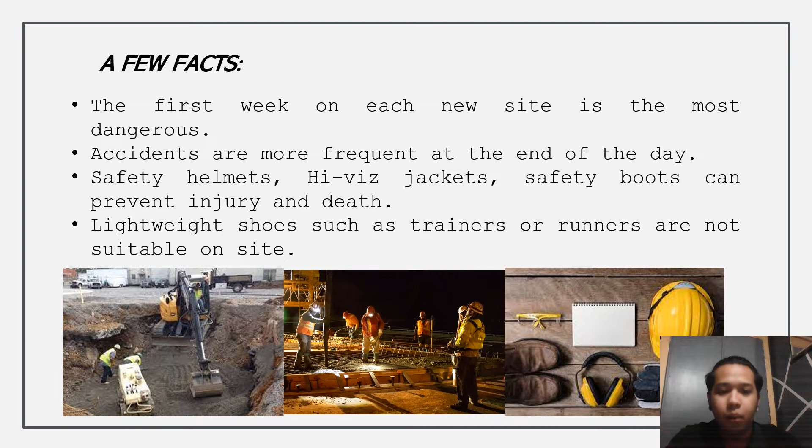Also, safety helmets, jackets, and safety boots can prevent injury and death, and lightweight shoes such as trainers or runners are not suitable on site. So when working in the construction field, we should wear the proper clothes in order to prevent accidents from happening.

So why does the issue of safety arise? Because of frequent accidents, there is a loss of labor, money, time, and material. And also, due to accidents, there is a loss of reputation of the builder.

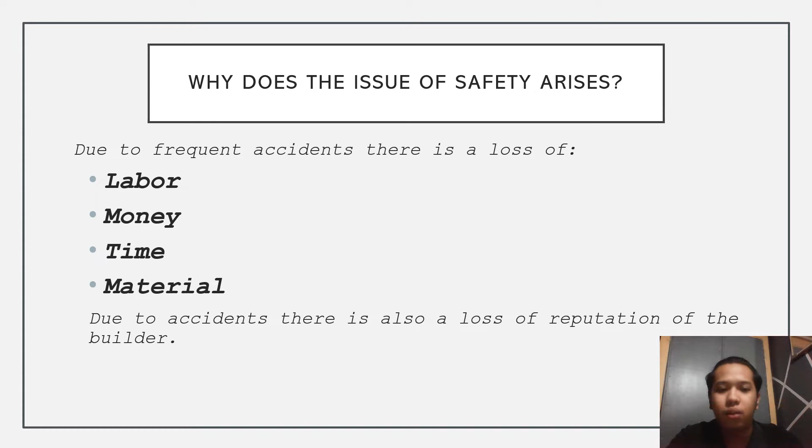If you are the contractor and you have a bad record of accidents that happen under your leadership, it is a stain to your reputation. So as a contractor, we don't want that to happen.

We were saying accidents previously, so basically, what are accidents? Accidents are readily recognized when there is damage to properties and someone is injured. But generally, an accident is defined as an event which is unexpected or the cause of which is unforeseen, any occurrence that interrupts work or whose cause is unforeseen.

However, it is not always easy to determine to what extent accidents are the direct result of the working environment only, so there are factors to consider in determining sources of accidents. It can be unsafe equipment at work areas, long working hours that may cause fatigue, and also improper living conditions and improper working conditions.

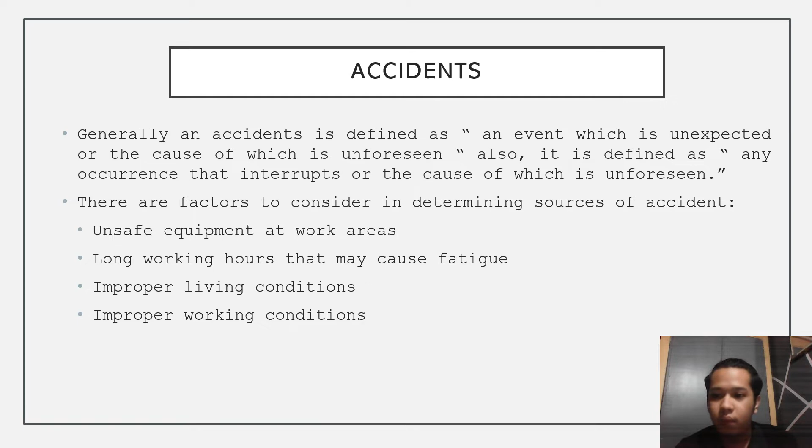In the construction industry, there are many types of accidents that happen. Here is the breakdown of fatalities according to type of accident in the construction industry.

Based on data, 56% are falls from heights, 21% is trapped by something collapsing or overturning, 10% struck by a moving vehicle, 5% contact with electricity or electrical discharge, 4% struck by a flying or falling object during machine lifting of materials, 3% contact with moving machinery or material being machined, and 1% exposure to a hot or harmful substance.

This is why safety precautions should be observed in the construction field, because many types of accidents happen from just one carelessness of a worker, and it can cause injuries and deaths.

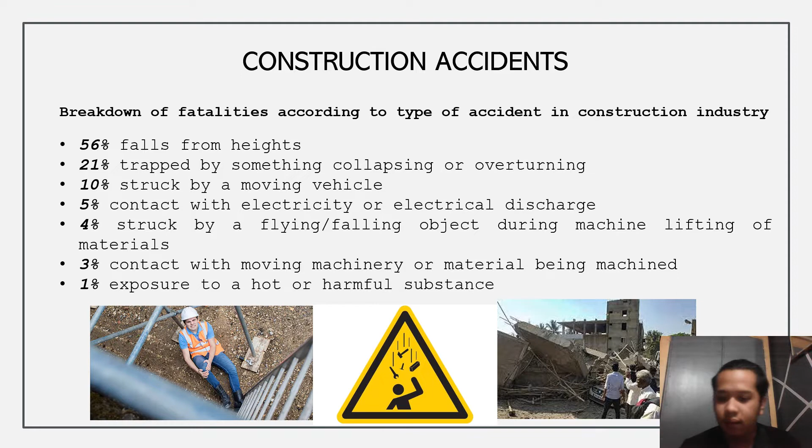We have three classifications of the causes of accidents in the construction industry. The first is human causes, faulty working methods, and also structural failure. Let's dig deeper into this.

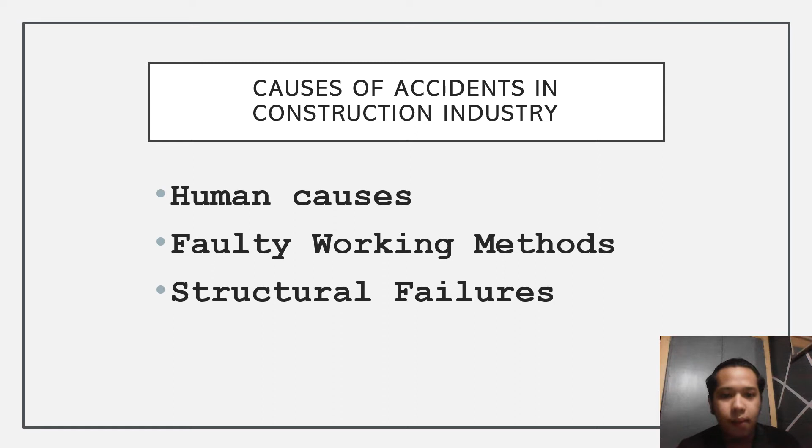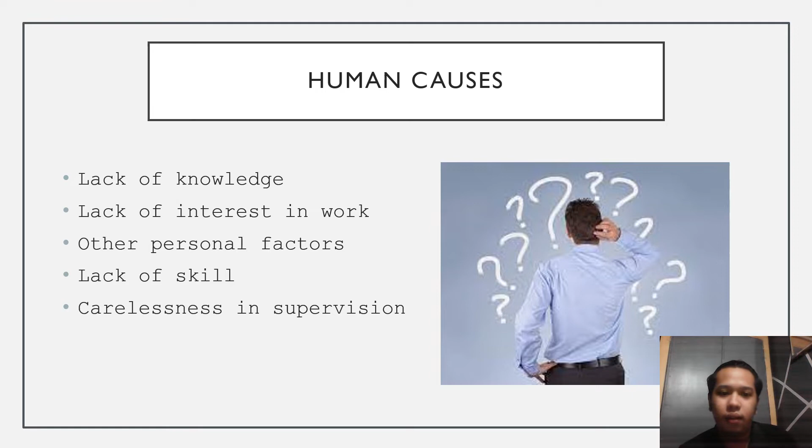For the human causes, the factors are, of course, lack of knowledge, lack of interest in work, other personal factors, lack of skills, and carelessness in supervision. If you are working in the construction field, you should know what you are doing, because if you are not knowledgeable enough in what you are doing, you can be the source of accidents and can lead to injuries and deaths of yourself or other workers.

Also, for faulty working practices, one factor is the use of substandard materials and striking against objects, no use of protective equipment, no site layout, and improper storage of materials. Sometimes, in our desire to lessen cost, some contractors use substandard materials, and because of this, it can be a cause of an accident.

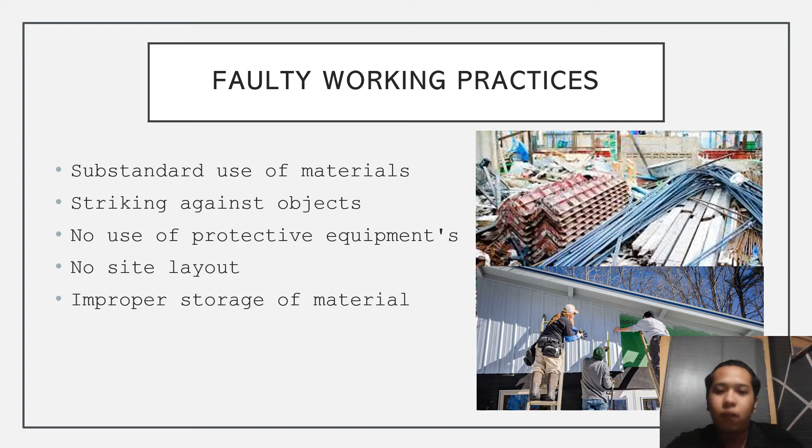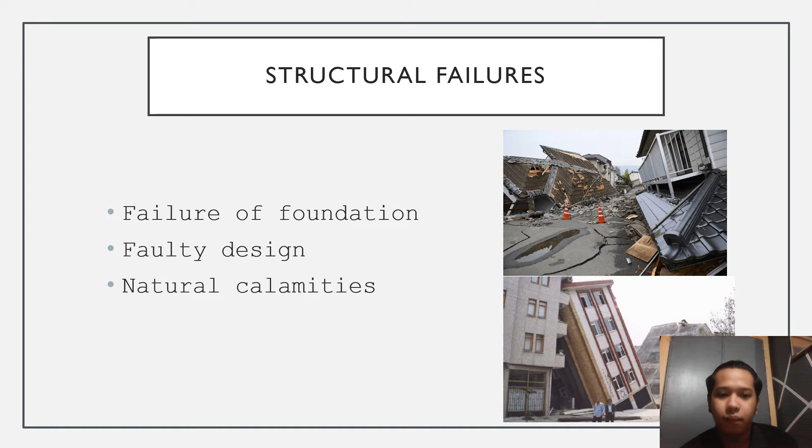For structural failures, examples are failure of foundation, faulty design, and natural calamities. For faulty design, upon doing structural analysis, maybe the loads that are considered are wrong, or the sections are not adequate for such loadings or other variables, and that causes structural failures.

So how to avoid the most common accidents in the construction site? We have several methods or steps to avoid the frequent accidents from happening in the construction field.

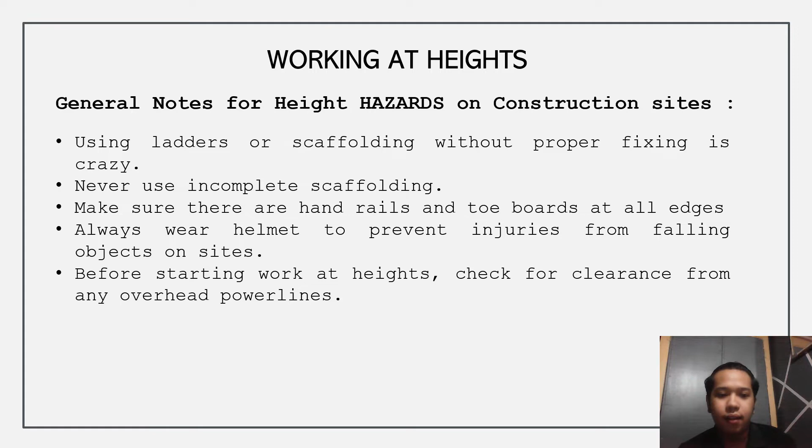Never use incomplete scaffolding. Make sure there are handrails and toe boards at all edges. Always wear a helmet to prevent injuries from falling objects on site. And before starting work at heights, check for clearance from any overhead power lines.

Also, we should observe the proper and safe use of ladders. In the construction field, we often use these ladders when working at heights. First, never allow more than one person on a ladder.

Use tool belts or hand lines to carry objects. Do not lean from the ladder in any direction. If you have a fear of heights, just don't climb a ladder. And do not allow others to work under a ladder in use.

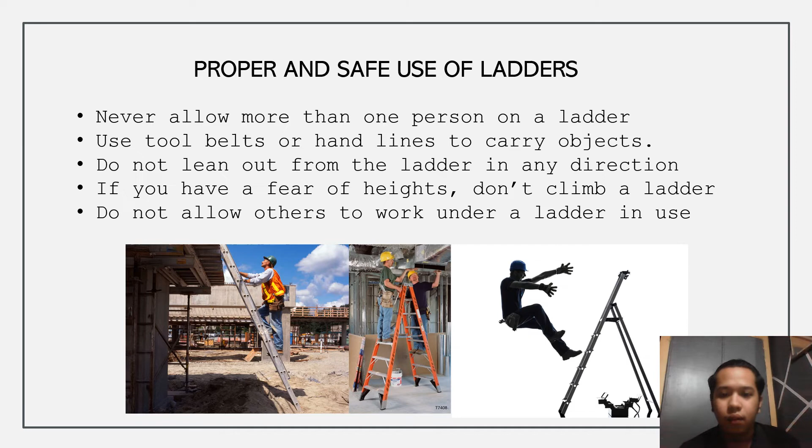If doing excavation work, if you want to avoid being buried alive, apply these rules. First, all excavation deeper than 1.25 meters must be shored or battered. Also, excavation deeper than 2 meters must have a guardrail or barrier, and vehicles tipping into the excavation must use stop blocks.

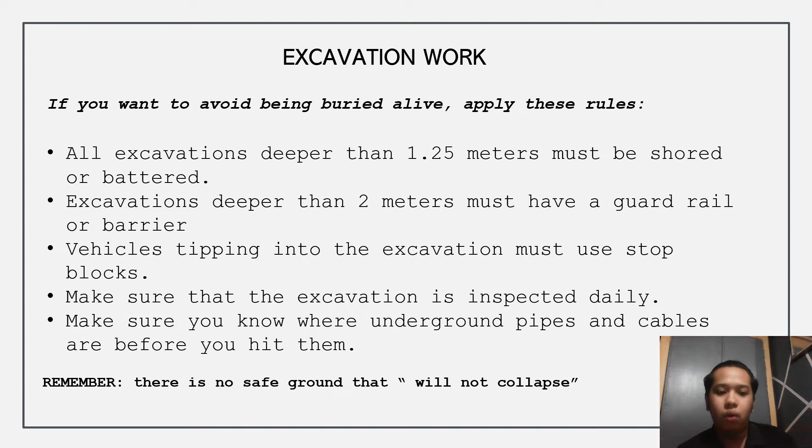We should make sure that the excavation is inspected daily, and make sure you know where underground pipes and cables are before you hit them. We should always remember that there is no safe ground that will not collapse.

Ways to ensure safety. There are many ways to ensure that proper safety is provided on the site. Here are some of the ways we can provide safety on site: the role of the designer, safety program, appointment of safety officer, and provision of personal protective equipment.

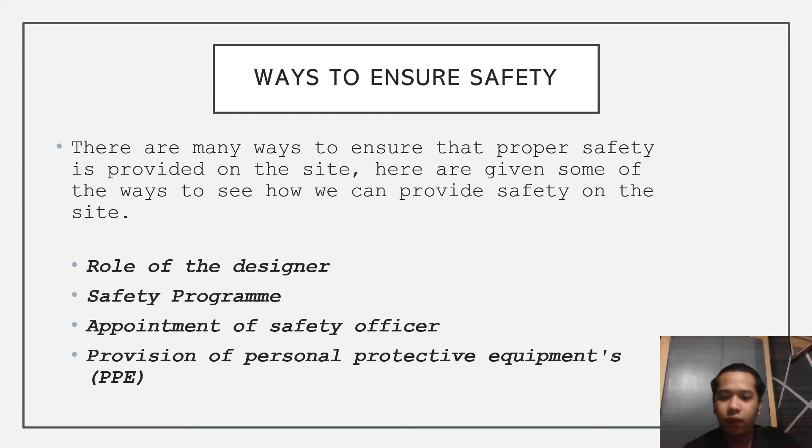Let's dig deeper into these factors. What are the roles of the designer in securing safety in the construction workplace? In the development of a project, a significant role is played initially by the designer of the project, and then by the constructor of the project.

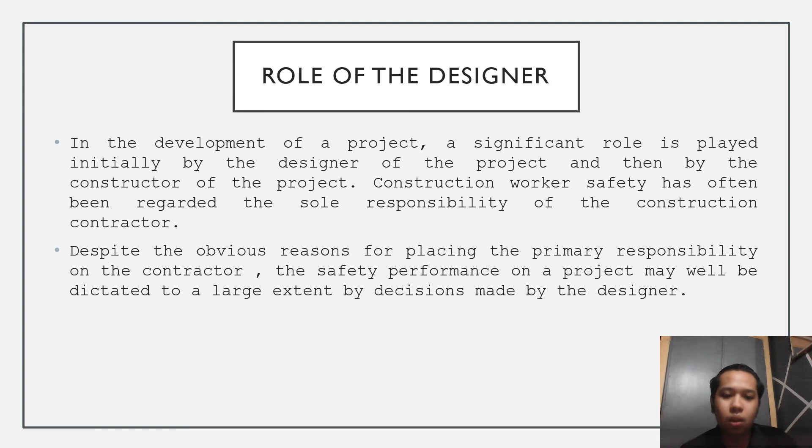Construction worker safety has often been regarded as the sole responsibility of the construction contractor. While designing, the building can be designed in such a manner that it becomes easy and safe for the construction of the higher parts of the structure. Despite the obvious reasons for placing the primary responsibility on the contractor, the safety performance on a project may well be dictated to a large extent by decisions made by the designer.

Also, a safety program is important because most of the accidents that take place are mostly due to the lack of knowledge and skill of the workers and the supervisors. This can be improved by holding safety training camps for the whole site staff and workers. Specifically trained personnel should be hired to hold safety camps.

Also, whenever recruiting a new worker, their experience should be checked and adequate knowledge of the work should be given to them. And keep a record of all accidents that took place in the construction field.

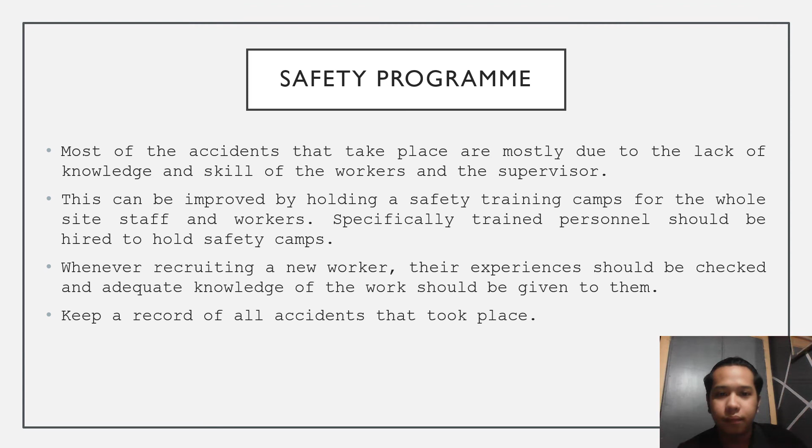Next is the role of the safety officer. A safety officer should be specifically appointed to take care of all the safety related issues of the construction site. Appointing such an officer helps to ensure the health and safety of the staff. If accidents happen on the site, the number one person responsible is the safety officer. So the function of the safety officer is very crucial in the working field.

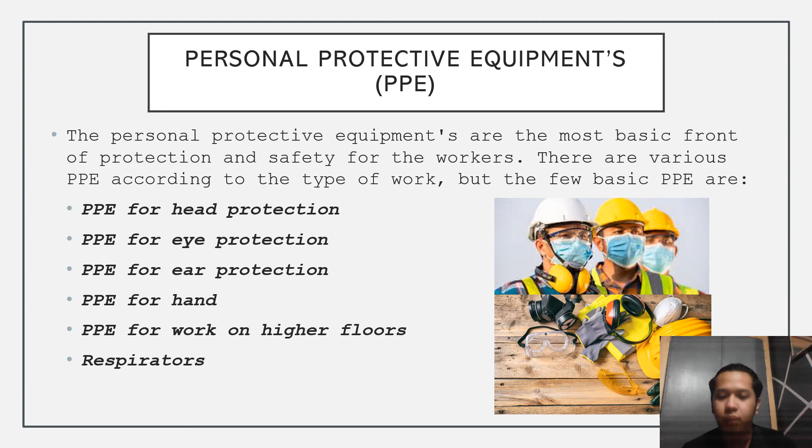Next is the PPEs. Personal protective equipment is the most basic front of protection and safety for the workers. There are various PPE according to the type of work, but the few basic PPE are for head protection, eye protection, ear protection, hand protection, protection for work on higher floors, and also respirators. These are just some examples.

Now let me share with you the basic safety philosophies for success. We should always remember that all accidents are preventable. No job is worth getting hurt for. Every job will be done safely. All incidents can be managed. Safety is everyone's responsibility and continuous improvement.

Also, safety is a way of life for 24 hours a day, and all individuals have the responsibility and accountability to identify, eliminate, or manage risk associated with their workplace. Also, legal obligations will be the minimum requirement for our health and safety standards, and individuals will be trained and equipped with the skills and facilities to ensure an accident-free workplace.

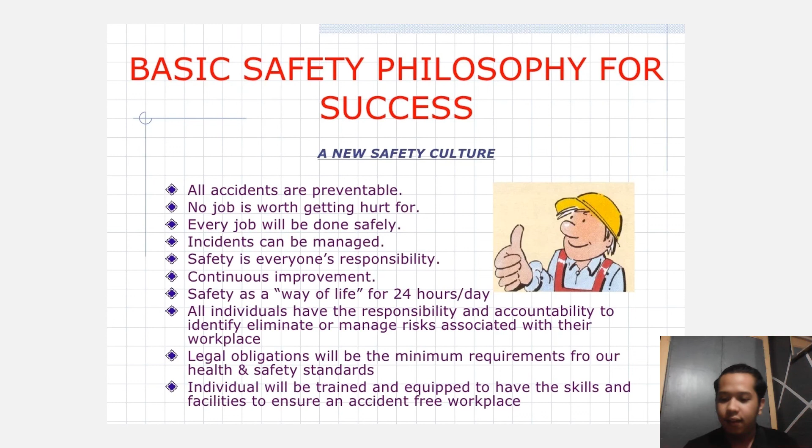So that would be all. I hope you learned something, and thank you.